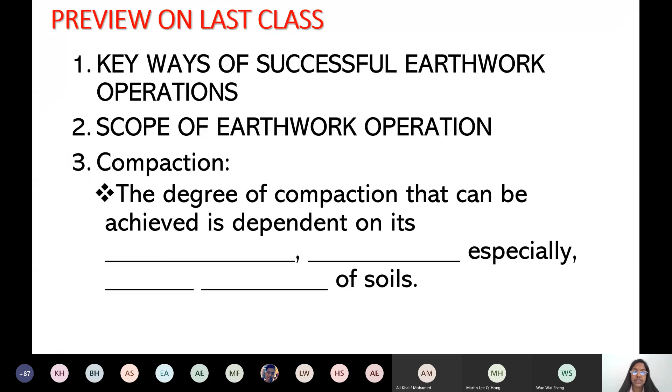compaction of the soil that have been used for earthwork operations, right? What is bulk density?

Can you see the slide? Review of last class - can you see the slide? I'm now showing the winners from last class. Can you see the slide? Yes, miss. Please tell me, what is bulk density?

What is density? Quick one. Others, I hear the same voice all the time. How many of you joined so far? I will take it later. Can you tell me what is bulk density? What is density? Mass over volume, right?

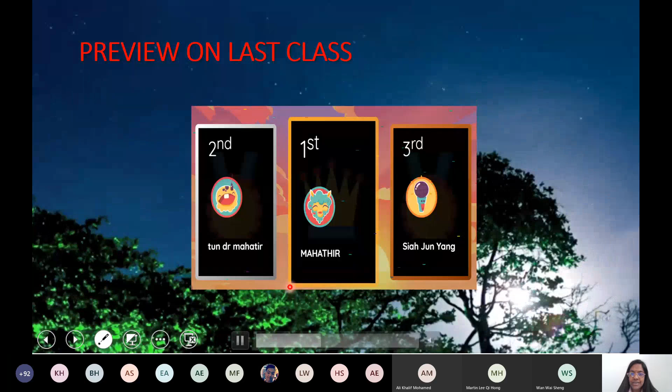How much material is stored or occupying a given volume. Bulk density refers to the same density but for loose materials. What do you mean by loose material? Anybody? Please think and answer me.

It can be wrong, no problem. I'm not testing now, but a response is important. All of you should answer, otherwise I pick people to answer. Make it interactive - what do you mean by bulk density? I asked, now I'm asking why.

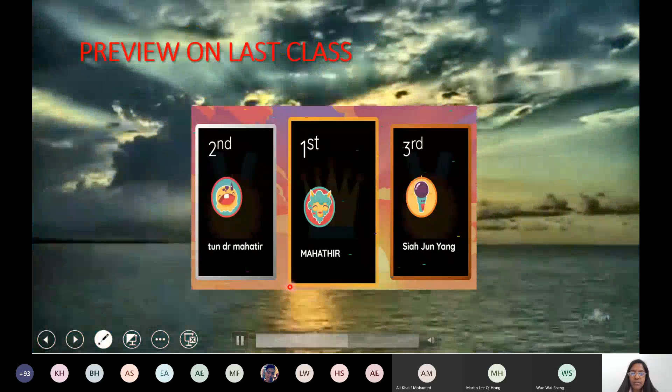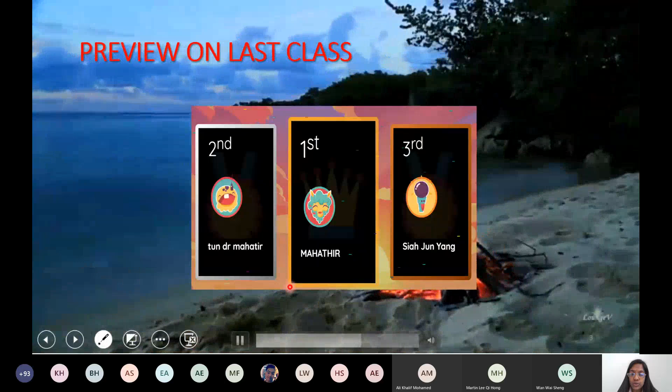No, I say it's a loose material, right? Bulk density is referring to loose material like grains, like soil, right? Earth, wherein you cannot use density because it is not tightly packed. Loosely packed - for any loose material we use bulk density.

Okay, what do you mean by loosely packed? Why do you say this is loosely packed? What are the other materials you can see there?

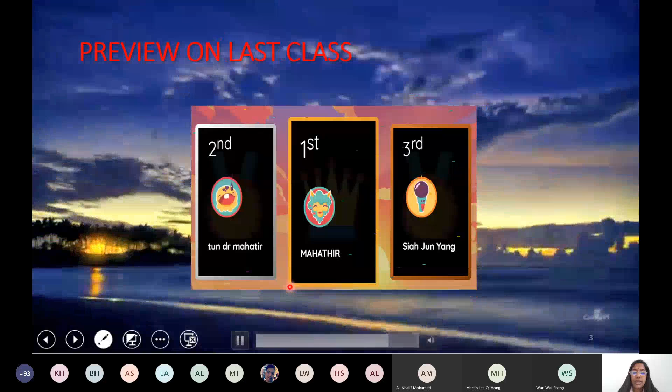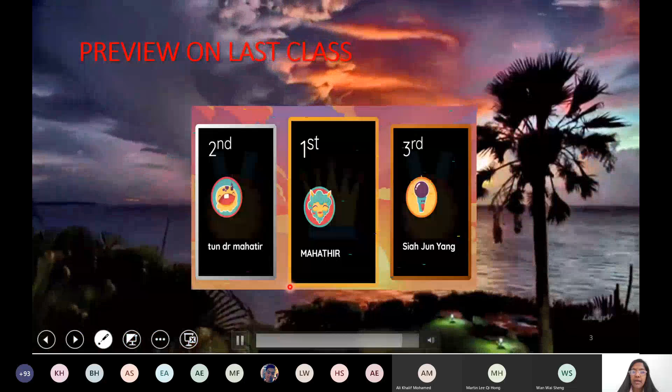So in addition to soil, you can see the air spaces, right? The pores are there, a large number of pores are there. The pores might be occupied by water, air, or any other materials. If it is sandy soil, more glass particles or carbon, and many other minerals are together with this, isn't it?

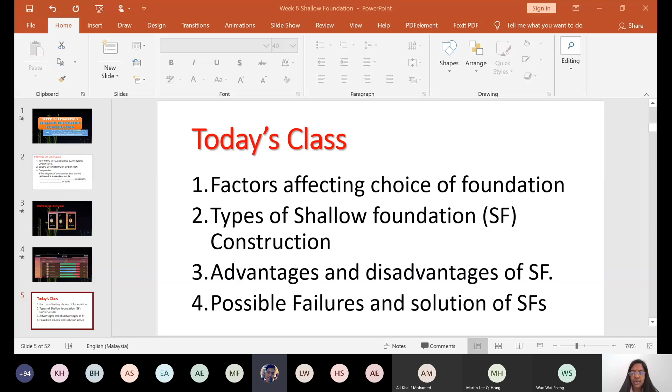Can you all see the slide? Yes, yes, yes, miss. Okay, good.

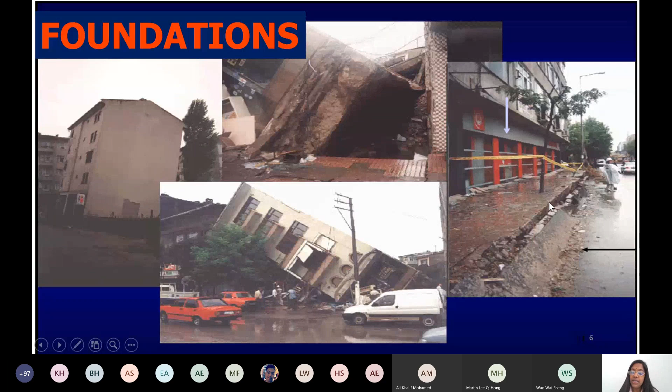It's not that - the drainage is not properly flowing or disposing of the water. There is a blockage, and these are all caused due to improper basement, improper laying of foundation.

Let us understand how this can be alleviated by proper understanding of the type of foundation, their limitations, and the conditions under which it can be constructed.

Number one, before you go into actual foundation design, you have to know the total structure, or where the location of the foundation is. Where is the foundation?

Bottommost is the prime structure in any building. It can be residential, research, or any type of building. A building construction can be classified into 3 categories.

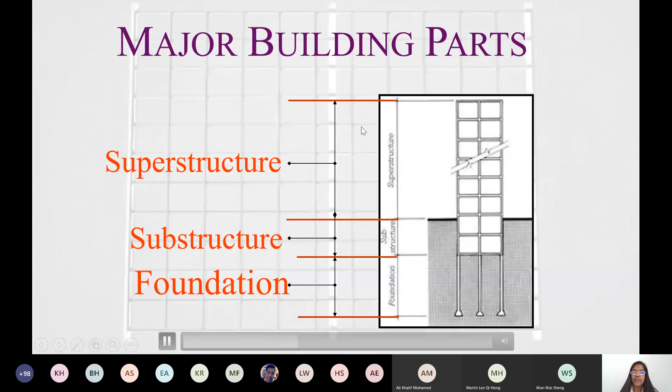Number one, the bottommost will be the foundation, and then the substructure, which is called the basement. Sometimes a structure may not have a basement, like in shallow foundation, because that space is occupied by the shallow foundation itself. We will see how they are. And then above this basement is what is called the superstructure, the top structure of the building that will be constructed.

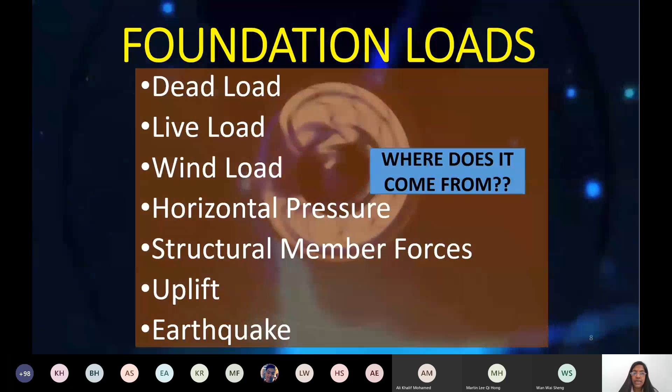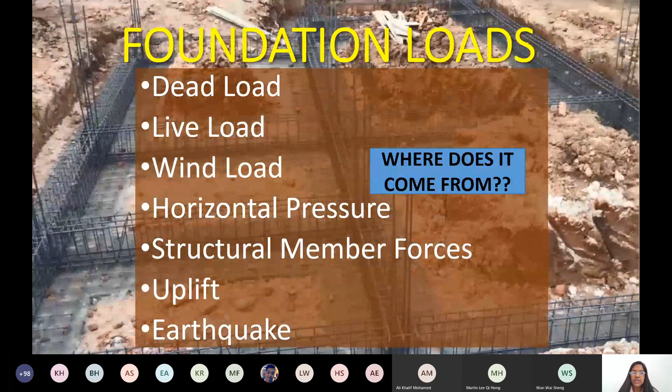As engineers, we should know how to design the foundation. The first and foremost thing for a design is calculation and consideration of the load. What's the purpose of foundation? Foundation is transferring the entire load of the substructure and superstructure into the ground, hence the structure is safe and stable at any point of time.

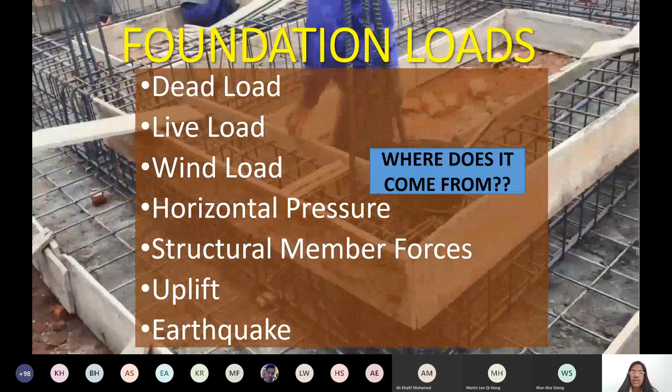It may be heavy wind, earthquake, or flood. In all these vulnerable situations, the building remains safe and strong due to proper consideration during foundation design. The first thing you have to decide or calculate is the loads. Let's understand the types of loads which have to be considered for a foundation or footing design.

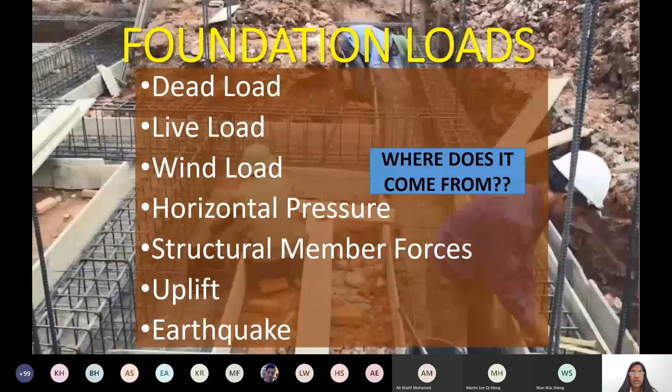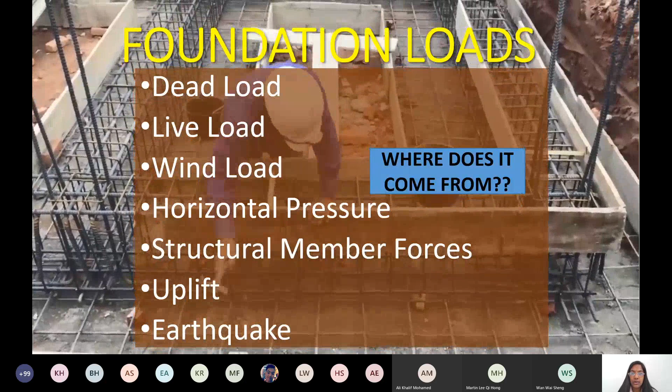Dead load, live load, wind load, horizontal pressure, structural member forces, uplift, and earthquake - these are the major forces that have to be decided. Depending on the structure, whether it's residential, medium story, multi-story, skyscrapers, or any type of bungalow building, depending on the occupancy, the types of load will vary. You don't have to calculate everything for all structures, otherwise you'll be over designing. There are limitations; you will understand by practice.

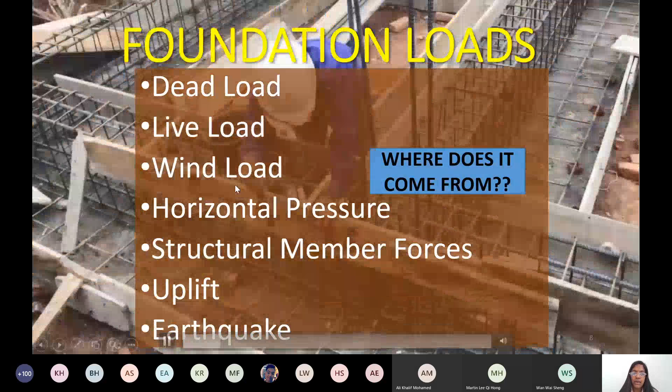But these two are the major and main loads that have to be considered in any footing. This is also important for buildings with more than 3 or 4 floors - above that, you should consider wind load and really go for an analysis of wind load, pressure, and other things. Let's see one by one what they are.

Let us understand about load distribution. I think the explanation is not here - the slides are removed because I need to accommodate more types of foundation. Let me explain the types of loads.

Dead load means self weight of the building, or weight of the building. It depends on the material used, and it depends on the size - length, width, depth. Based on that, you can calculate how much cubic meter of material is used. That is called dead load - the self weight of the material.

Live load may be the load that is moving - in a residential building, all the movable loads like furnitures, decorations, landscaping will be considered as moving loads. All live loads mainly mean moving loads, or loads apart from the material used for construction and the elements of the building like columns, beams, slab, and so on - all the moving loads.

Wind loads - due to wind, there are different types of analysis and design. You need to know which direction, and there are codes available. You can borrow the building codes - they have all the code values and coefficients for multiplying, finding the safe bearing capacity, and the proper design and sizing of the materials and components. You can follow the building codes.

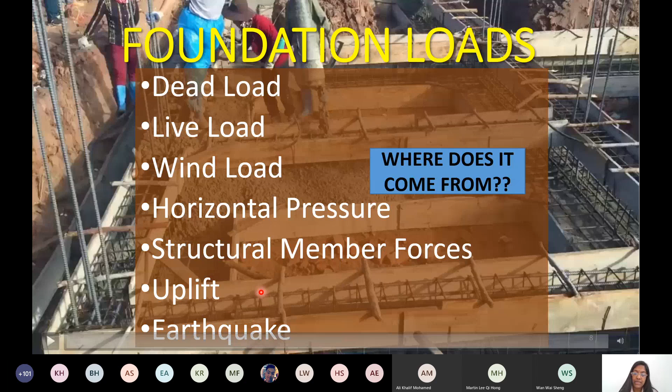Load distribution. Let us understand how the load is being distributed. There are two types we can see: one is for the slab, another for the roof. Let's see how a roof load is distributed and transferred down to the foundation.

Started with the roof. Here is the roof truss. I'm showing a truss building, but this is still valid for any type of concrete or brickwork construction. This is the roof. See the direction of loading. The force or load - what is the unit for load? Newtons. Okay, let's take it as newtons, or kilogram force if it is metric.

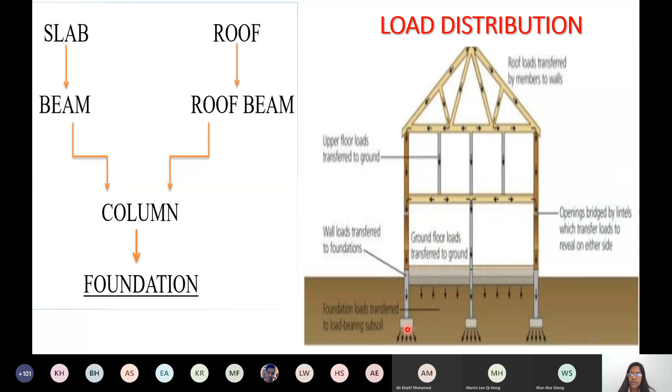So this force is coming over from the roof. It is being transferred to the beams, and then it is being transferred to the columns. You are seeing the cross-sectional elevation of the building, maybe a side view. This is transferred to the column next, and from the column to the subsurface or basement, finally to the foundation - can be any type of foundation. You can see the transfer of loading by the direction of the arrow, showing how the load is transferred to the foundation or the footings. This is for the roof.

And for the slab, you can see how the load is distributed from the slab - sorry, I mean the slab. Let us take it at one level; there's a nice drawing to explain this. The slab loading: the slab is resting on the beam. Hence the loading due to the slab is transferred to the beam. You can see the cut section here clearly.

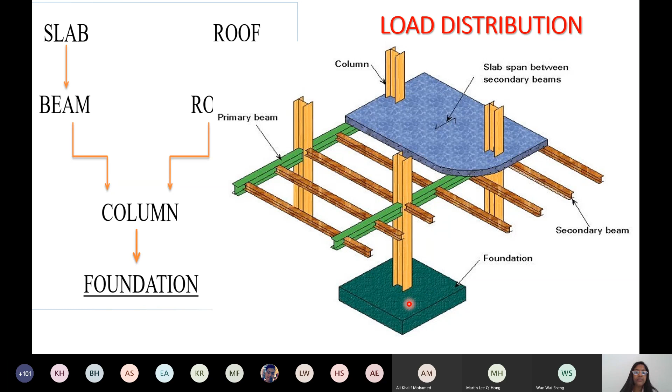And this beam will transfer the load to the column. The load from the beam is taken by the columns, and then the column will transfer the load to the foundation, which has a footing - a pad-like structure, or a cap. It can be a pile cap, or a footing cap, or a pad. Okay, being transferred to the foundation below the ground. Any questions so far?

No, miss. Okay, types of foundation. There are two - basically foundations are classified into two categories. Wherever you go - Europe, Australia, Middle East, India, China, anywhere - the types of foundations are shallow and deep. You need to understand this. Shallow foundations are used for low cost, light load, where the bearing capacity is good, subsurface soil is good, and depth of foundation is less.

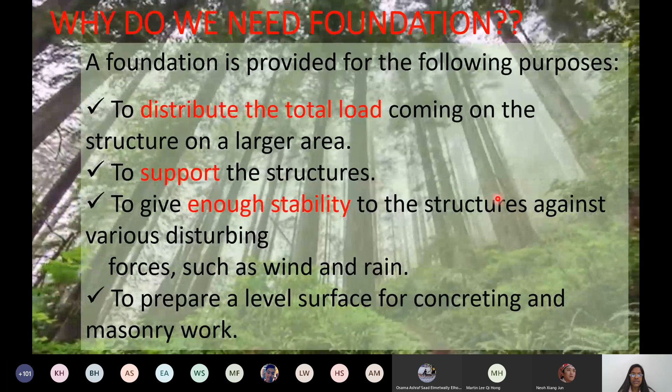A foundation is provided for the following purpose. Come on, detailed information is here. To distribute the total load coming on the structure, distribute, transfer, all are same, to the larger area, mainly the earth. To support the structure, to give enough stability.

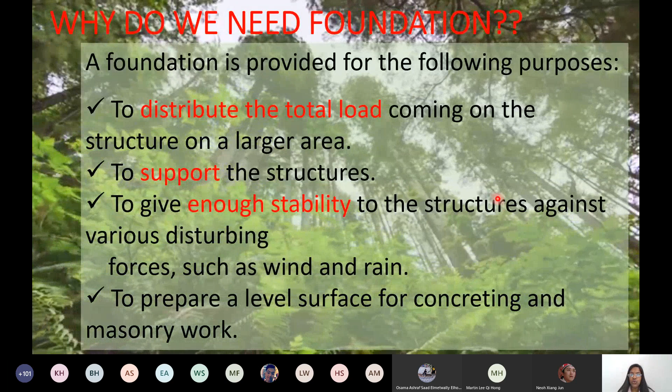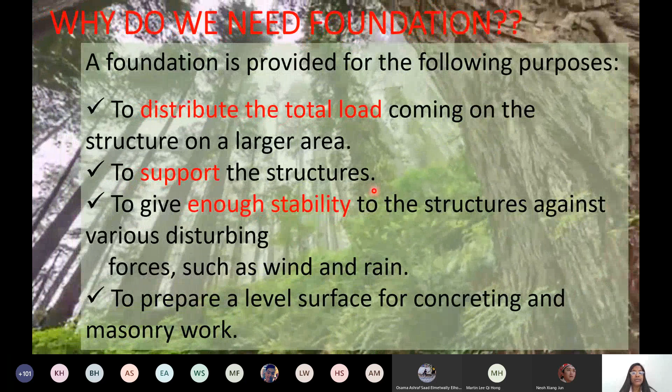I don't go in detail about giving more examples today because I heard there are some tests after this. Anyway, I will post this later if there are many examples needed through videos. For now, I touch upon the important things.

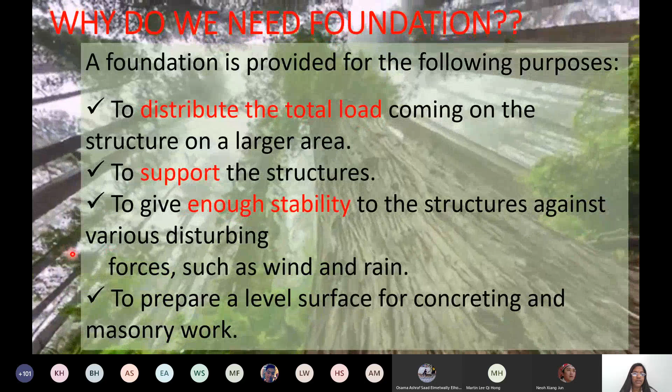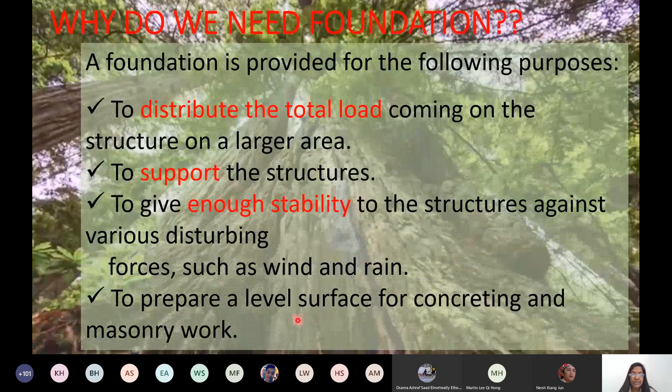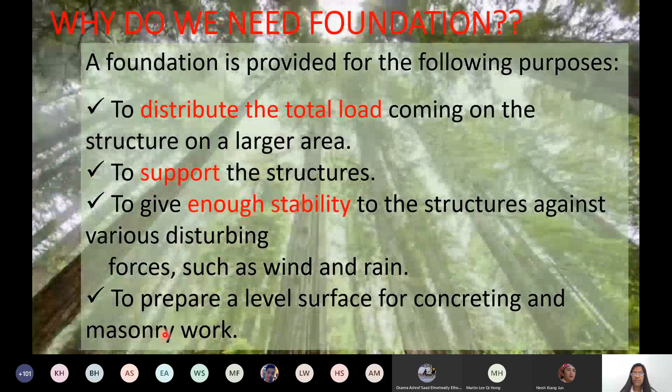Okay. To support the structure, to give enough stability to the structure against various disturbance like wind, earthquake, landslides, and so on. Forces such as wind, rain, heavy rain. To prepare a level surface for concreting and masonry work. Foundation is required to prepare a level surface, a pad or a mat for the masonry work above, a base for holding the walls and columns above. Okay, I don't do much on this, you can understand.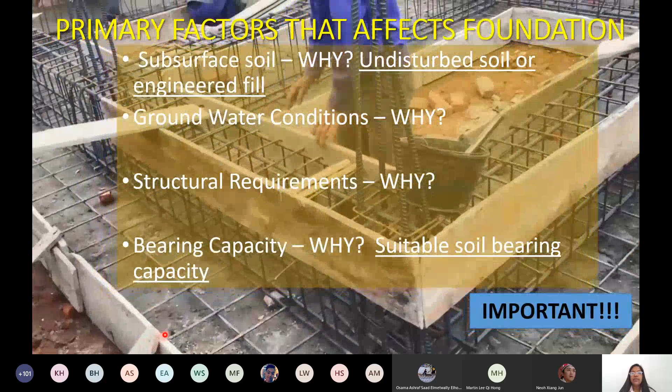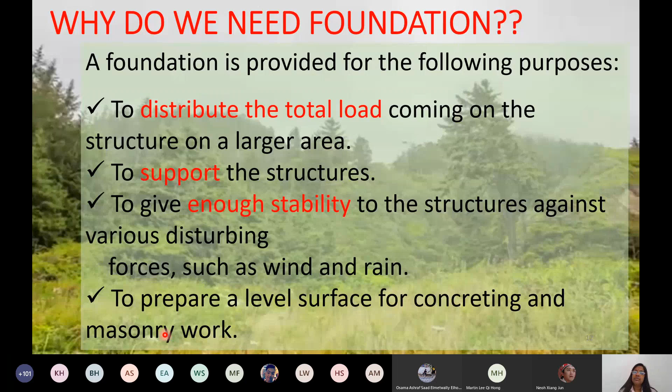Primary factors. Let's understand the primary factors that affect foundation. Subsurface soil or undisturbed soil or engineered fill. Okay, before I go into this listing, can you tell me what are the factors? You know what is foundation design, right? Now tell me what are the factors affecting the foundation design? Soil bearing capacity. Bearing capacity, very good. So that decides the type of foundation.

You should be clever, ingeniously select the type of foundation when you start the planning itself, right? In the planning, designing, before you do the construction, you should choose the proper type of foundation to avoid any type of failure. The example I shared last class in Gombak, right? In Gombak, there is a landslide because of unidentified underground water below the earth. After some period of service, they got the problem.

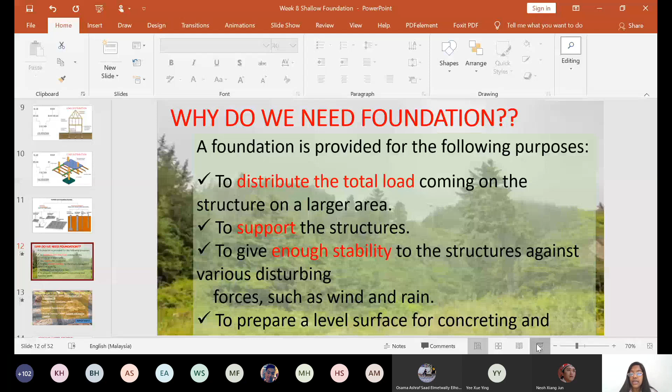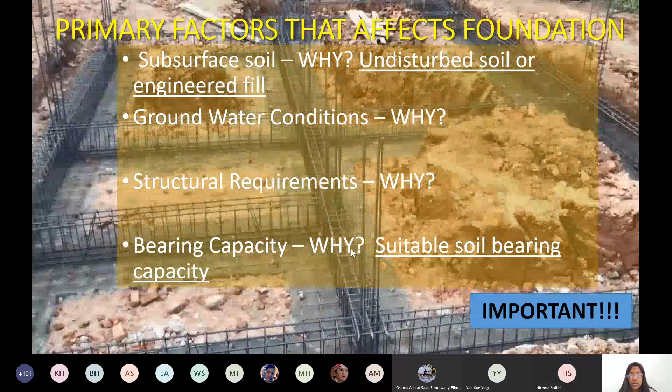Come on, let me check how many joined. 112 people, very good strength today. Only 2 missing. I don't know who they are. Okay, come on. Where are we? Can you all see the slide? Why do we need foundation? Oh, I did already. We didn't run factors. Yeah, can you see the slide? Yes. Okay. Anytime you cannot see the slide, please stop me.

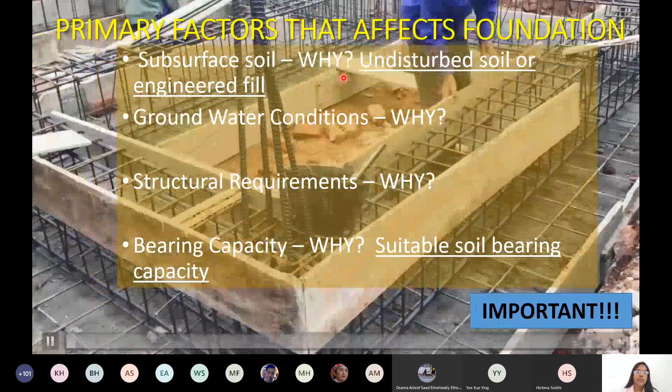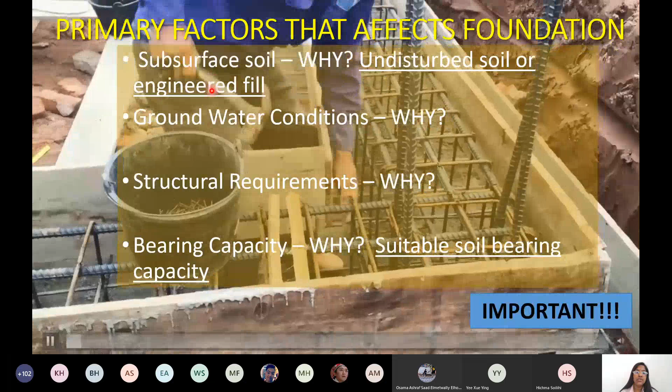Okay, thank you. Subsurface soil. The conditions or criteria which will determine the type of foundation will be subsurface soil. Whether your subsurface soil is just 1 meter below, right? And whether this subsurface soil is very hard, or soft, or needs to be processed, compacted more.

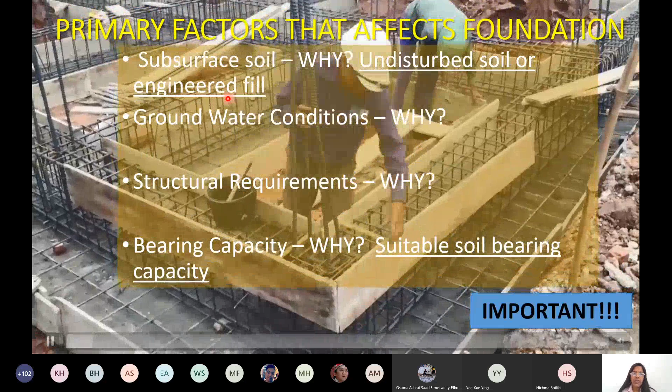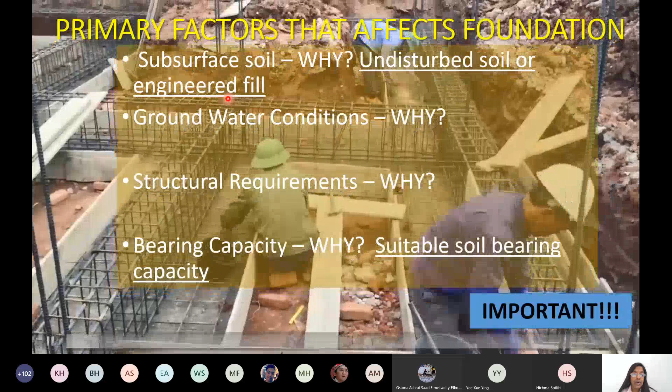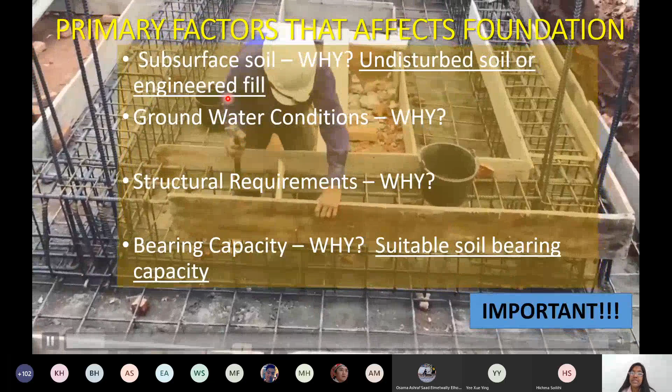And then groundwater conditions, whether the groundwater table is at one. See, in Malaysia it's quite common, unlike Saudi, India, China. India, China, and then Saudi, they all have water very deep, right? No water or very deep, like they have to go about 200, 300 meters below the ground. When you come to Malaysia, maximum 20. If you see the borehole data for Malaysia, you can see about 10 to 20, even 5 meter deep to maximum 20 meter deep, you can get very good groundwater.

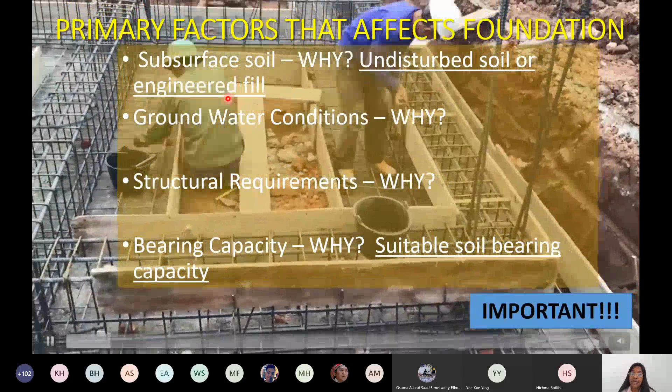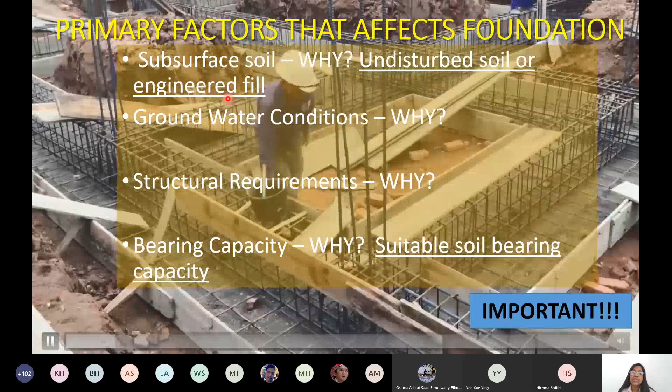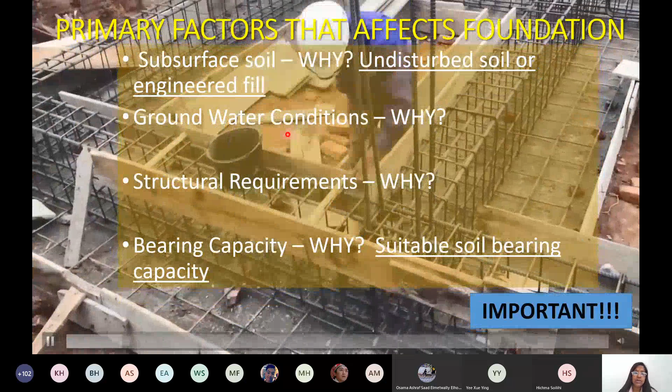So you need to check where the groundwater level is, whether it is a continuous supply or intermittent supply, what is the type of source, then you decide the type of foundation. That is important. You should not be putting your footing on the water table, right? It will be washed away. Your structure will be washed away.

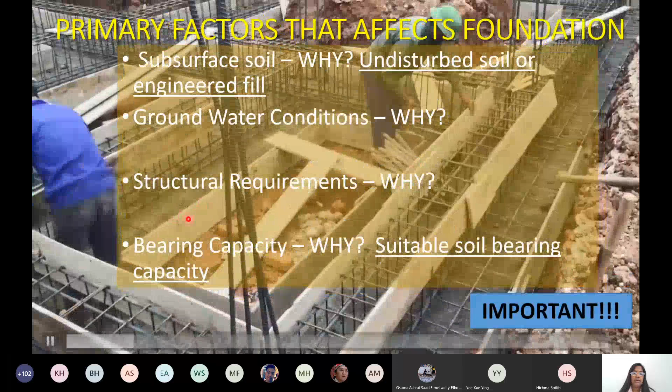And structural requirements. What are the structural requirements? Sometimes they want a floating structure. Sometimes they want a stable structure, some landscaping, full of landscaping, or full of moving material like a theme park, theme park construction, and so on. So it depends on that structural requirement as well.

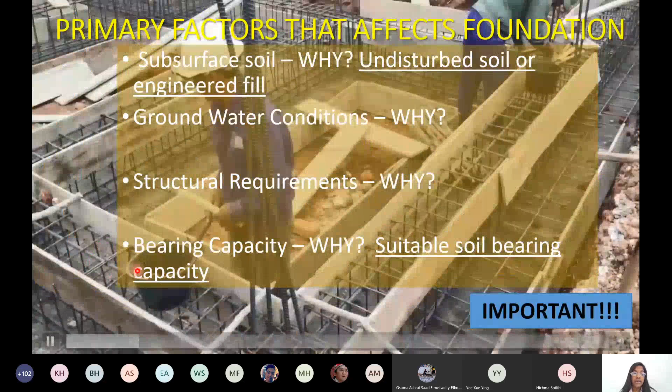Then bearing capacity, that's the most important thing. Our friend also told, bearing capacity is the main thing that will decide the type of foundation. When bearing capacity is already good from the soil, you go for shallow. If not good, go for deep foundation. Okay.

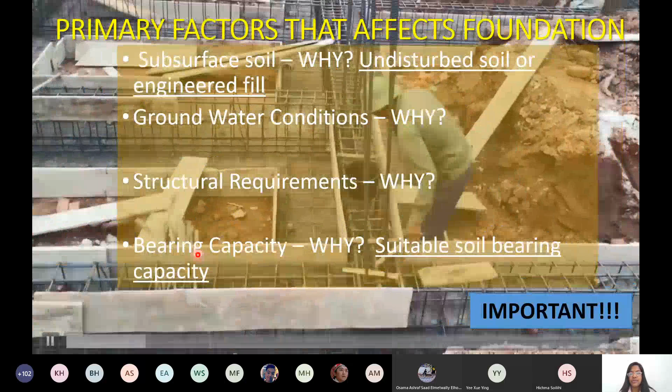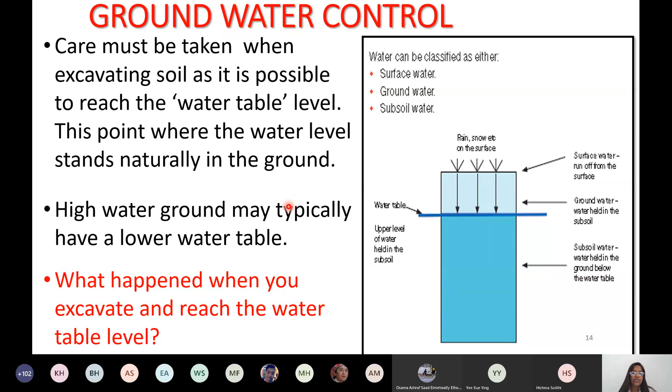And how do you overcome this problem? By using proper pumping arrangement. If there is any type of oozing out or passage of water, intrusion of water into your underground digging, then you should see what is the first thing you avoid, right? Wherever there is a high water table level, avoid such location and see whether you can entrap the water or remove the water, pump out the water by using this type of suction pump so that it will not affect your construction.

That's the information here. Why do you need to remove water? First of all, why do you get the water? Because of hydrostatic pressure, the hydrostatic nature of the water table there. What is hydrostatic nature? Some fluid mechanics. Anybody? Engineers? Problems of excavation depend on the tendency to fill in the excavation due to hydrostatic pressure. What is that? You have studied it in fluid mechanics. Quick one.

Pressure that is exerted by fluid. Oh, pressure. Yeah, very good. Pressure caused by fluid. The water moves from the high pressure point to the low pressure point. No, you touch upon the point, but it is not the correct valid reason.

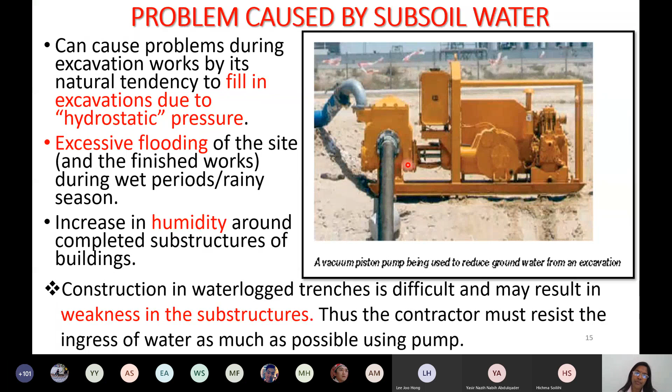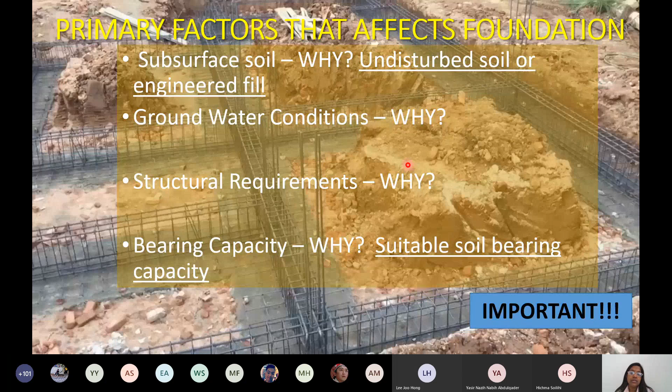Second, we just saw the primary factors like subsurface soil condition, groundwater condition, structural requirements, bearing capacity, and there are secondary factors, variables which affect your foundation choice: construction access, methods, and site conditions. Site conditions play a major role in the foundation choice, whether the public line or municipal line is nearby or far away. Depending on that, it may decide the type of foundation.

Environmental factors, right? Whether it was a pond before. Sometimes they fill up the pond and start the construction, right? Environmental factors like land use pattern, and then the climatic conditions of the place.

If it is always humid, if it is always a cold region, you should decide whether the raft or the shallow type of foundation holds good or not, and at what depth, how much time it is under humid condition, how much time it is under dry condition, you need to check.

Building codes and regulations, you should also follow. Your design is limited or checked by building codes, so check based on the codes. This is also limiting your design. In the beginning I told you, at the site you may see a civil engineer, a mechanical engineer, a supervisor who is not an engineer at all, right? A project manager who has experience in doing design and construction, right?

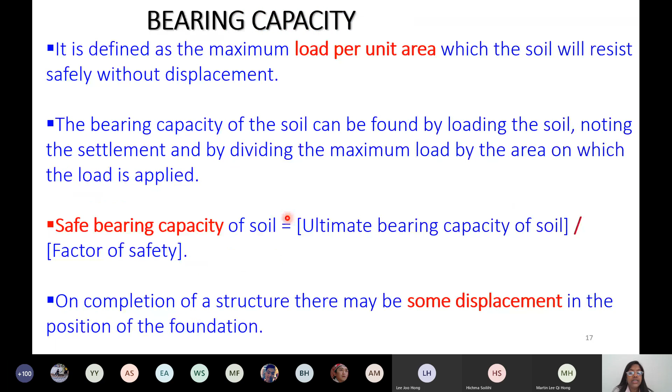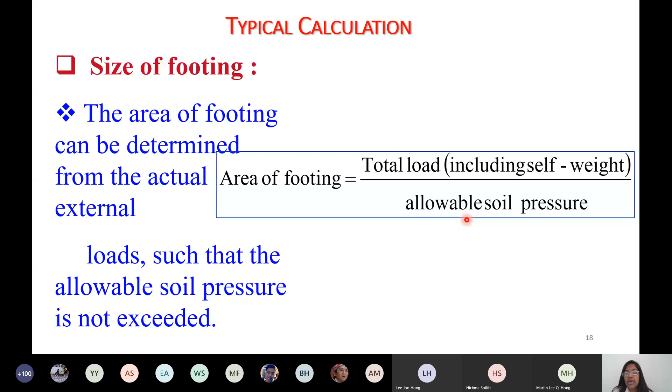Okay, the sizing of the footing in one line, a simple equation, a thumb rule. A quick calculation can be obtained by dividing the total load by the safe bearing capacity of the soil or allowable soil pressure, right?

Artificial methods to improve bearing capacity of soil. You can see some of the improvements for the foundation by increasing the depth of foundation, draining the subsoil water, pumping out, compacting the soil properly, confining the soil mass, cement grouting, and injecting chemicals like silicates.

Once you decide the type of foundation, or during planning for the type of foundation, you can go for these earth improvement methods or soil improvement methods, and then decide which type of foundation has to be designed, planned, and constructed. That can save your time, money, and also improve the efficiency of the design.

See whether by increasing the depth you can reduce the cost and increase the strength. See whether increasing the depth can increase the bearing capacity.

By draining subsoil water, if there is any subsoil water, find out the root cause, the pathway, and the quantity that is flowing there. Avoid or drain out the subsoil water by proper compaction of soil. If you found very loose soil, all of you know that the subsurface soil is very loose. Most commonly, the subsoil is found to be loose. You can compact the subsoil so that it is hard.

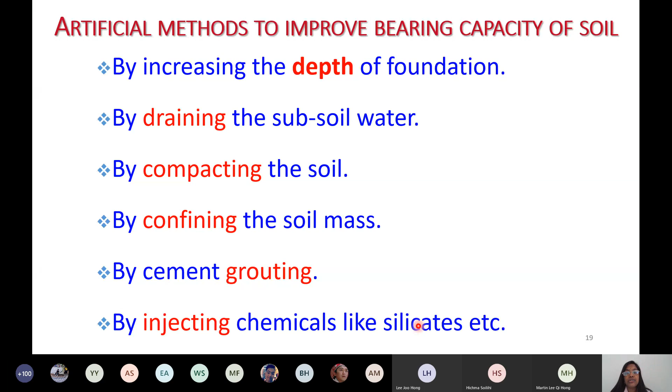Injecting chemicals like silicates, clay type silicates, are more in clay and sandy soil. So you can also have an injection of this mixture of sand and silt, or sand and clay, so that you can have proper binding and proper compaction of the soil. These are the ways you can improve the bearing capacity of soil before you design this type of foundation.

Essential requirement of a good foundation: the foundation should be so located that it is able to resist unexpected future influences which may adversely affect its performance. There are some unforeseen things you have to consider.

Suddenly the wind or climate may change, become more windy, or there may suddenly be a heavy downpour. That particular type of building may be subjected to a 100-year return flood. A 100-year or 1000-year return flood means a flood that happens once in 100 years, and its magnitude will be very high. It is not like your daily rain of 3 to 10 centimeters per day. No, it will be huge, about a meter, like a tsunami. A tsunami is a minimum of 10 meters high.

So if the building is subjected to this type of unforeseen return period flood, your building should withstand it to some extent. Further, you cannot be designing for a 100-year flood because it's a residential building, but you have to account for it to some extent to avoid unexpected failure due to unforeseen calamities.

The foundation should be stable or safe against any possible failures, so use proper materials and methods to have a stable and safe foundation. The foundation should not settle or deflect to such an extent that it impairs its usefulness. It should be stable, strong enough, should not tilt or get displaced. All these things should be avoided by proper selection of the type of foundation, material, manpower, and so on. There are many factors, but care should be taken in designing a good foundation and construction.

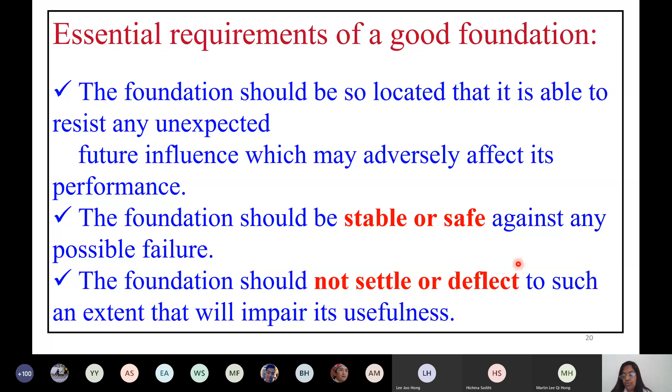While talking about the failures, major types of failures, let's see how they may be failing. Here you're seeing the types of failures, three types of failures.

This is a building framework. You're seeing the skeleton of a multi-story building, with the footing, the column, first level, second level, and ground level. You can see the small portion of the footing and foundation here, and this one is the basement, with the footing and column. In all these types, there is no settlement. The level of the ground and level of the footing remain unchanged.

When you go to total settlement, the whole building itself settles to this height, a small drop from the original level. The total building is settled. In differential settlement, each column or each row may be at a different level, some very low, others undisturbed. So you can see the sway here. The building is swayed and deflected, and the beams get deflected due to failure of the foundation or failure of the building itself.

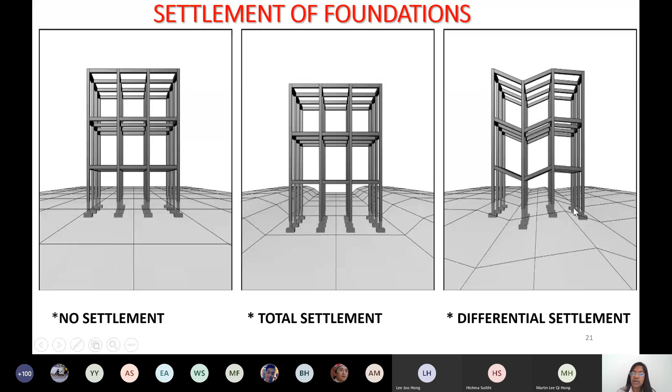Uniform settlement is usually of little consequence in a building. But differential settlement can cause severe structural damage. So uniform settlement we can still handle, but differential settlement is very difficult. Uniform settlement can be handled by proper projecting of the column and column pad, constructing underneath the ground, and you can lift the building together. But differential settlement is very difficult and complex to design and protect against, so care should be taken while choosing the foundation in the beginning itself.

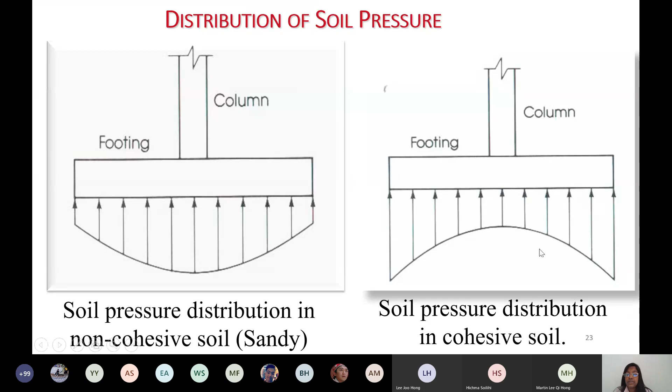In general, we can call this shearing stress. We will discuss shearing, puncture, and shear stress later on. Why do I call this shearing? Because one material is moving over another - during failure, the column is moving over the footing. We'll discuss this type of failure in detail later with diagrams, but in general it may be buckled like this, or punctured, or compressed, due to tensile or compression force.

What is shallow foundation? Let's move on to a detailed study of shallow foundation, which applies to every engineering structure. Any questions so far?

Oh, miss. Oh, no. No question. Please remind me, wait, I'll check the time.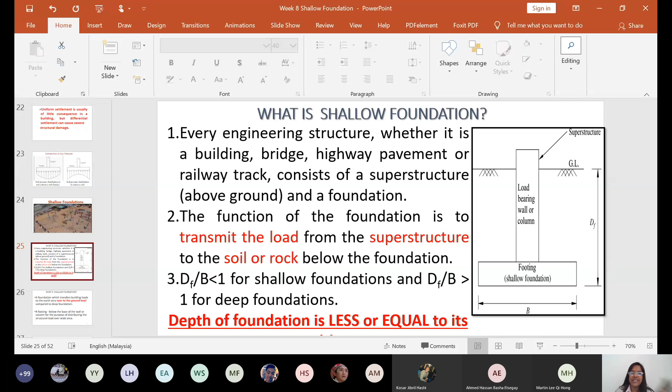What is shallow foundation, quickly? Every engineering structure, whether it is a building, bridge, highway, pavement, or railway track, all structures on the ground should be supported by a foundation. Hence, it's an important prior structure, which is the master or the parent for any building. The function of the foundation is to transmit the load from the superstructure to the soil or rock.

You've all studied already how it should be for a shallow foundation. For shallow foundation, the depth to breadth ratio will always be less; in other words, breadth will be more than depth, depth is very low compared to breadth, then it is called shallow foundation. On the other hand, if the depth is very deep, much higher than the breadth, then it is called deep foundation. Bear in mind, depth to breadth should be less for shallow, and depth to breadth should be higher for deep foundation.

If you want to select quickly what type of foundation to use, the first and foremost thing you have to consider is the depth and breadth. If the depth of foundation required is less than the breadth, then you will go for shallow. If the depth is more, like some feet, hundreds, 50s, 20s, then you go for deep, because shallow foundation can hardly go up to 3 meters, 5 meters, maximum 5 meters, 3 to 5 meters, not more than that. If hard soil is found nearer, like up to 3 meters, 5 meters, you can go for shallow foundation. 5 is also very high, so I can say 3 meters deep, you can go for shallow foundation. If more than 3 meters, then it is called deep foundation.

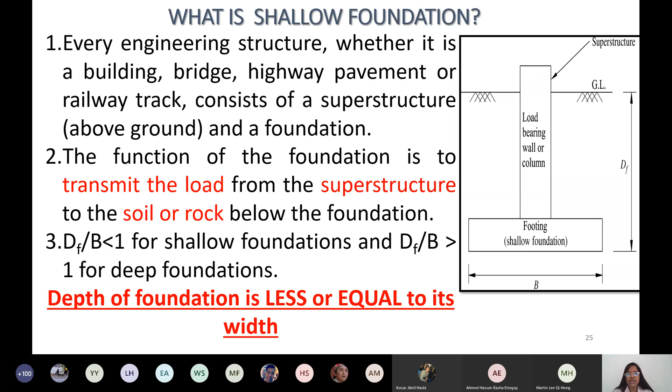A foundation, quickly, is one which transfers building load to earth very near the ground level compared to deep foundation. Yeah, very near, that is 1 to 3 meters. Can you imagine 1 to 3 meters? Height of a room, right? Maximum height of a room. I can call this a footing.

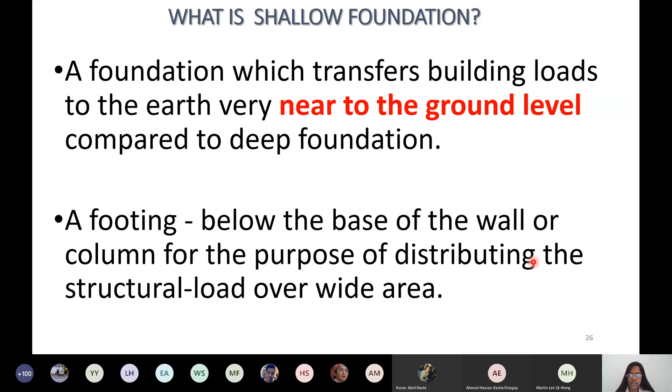A footing is below the base of the wall or column, for the purpose of distributing the structure load over a wide area. A footing is a kind of base, a rectangular platform, a rectangular base, a slab, which absorbs the load from the column and distributes the load to a wider area. It has a wider area to bear the load that is coming over.

The real difference between shallow and deep foundations is based on structural response as well as the depth to which the foundation is taken. As I just explained, depending on the depth, you can decide: if it is deeper, you must go for the deep foundation; for shallow, up to 3 meters, 1 to 3 meter, you can go for shallow foundation. If hard rock or hard soil is found up to 3 meters, you can go for shallow foundation. Bending is the predominant structural action in the case of shallow foundation, so you have to check whether there is deflection or bending.

Just now we saw two types, right? Tensile and compression type. If you check the soil for bending stress and it is predominant, that means bending is the predominant structural action in the case of shallow foundation. Because of the smaller depth you're going, there are high chances of flexural stress, so you need to determine the flexural strength of the soil before deciding the type of foundation, whether that particular shallow foundation can withstand this flexural strength. Otherwise, go for deep foundation.

There are equipments, even in our lab we can see equipments used for triaxial tests. Seniors may know, or if you go for soil mechanics or foundation engineering, you will be using this to determine the flexural strength of the soil. Triaxial testing machines are available.

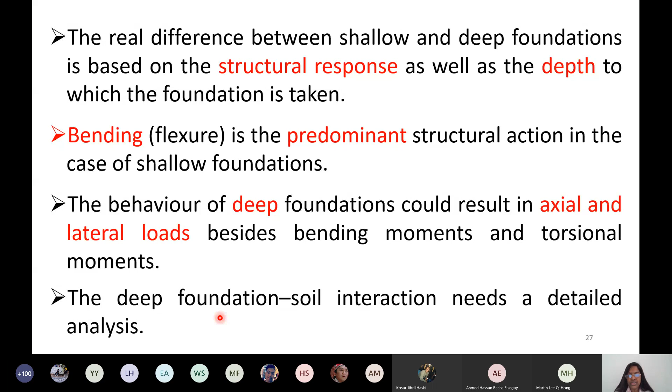Types of shallow foundations. Quick one, and this is most important for you. This is the scope of study for today. I may be asking questions in your assignments, and your quizzes will all be based on these types, all the types and their limitations. You should be able to classify and understand the purpose and limitations of each foundation. That's the main purpose of learning this chapter.

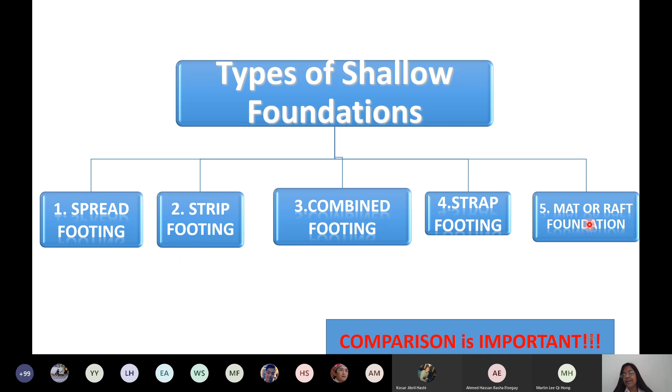Spread footing, strip footing. See the name itself, you can understand. Relate the name and the meaning of the word: spread, strip, combine, strap, mat or raft. Actually, when we were studying, there were only 3 types. Now more evolution has come out. We can use 5 types of shallow footing: spread, strip, combine, strap, and mat or raft. So comparison is most important for your assessments.

Spread or pad footing. How is it? You see the diagram here, it's easily understood if you look at the picture. This is the column, an I-sectional column, and there is a pad, and there is a footing. For a single load transmitted down a brick pier or concrete column, the most common foundation is square or rectangular, with a thick pad. A pad is used as a cushion-like intermediate element which transfers the load uniformly to the footing. To spread the load over a greater area, it is necessary either to make the pad thicker or use reinforced concrete, mostly as a slab with reinforced concrete. If load increases or the bearing capacity of the ground is poor, a larger foundation pad will be required. So spread or pad footing will be most commonly used in isolated columns.

Excuse me, who changed the...

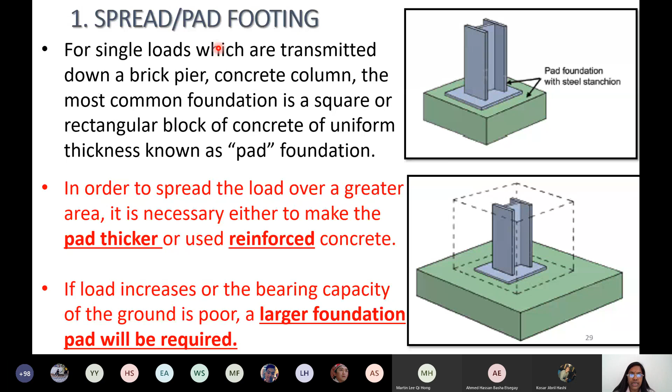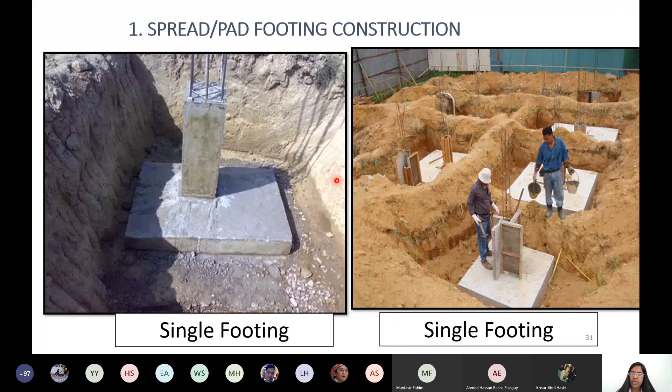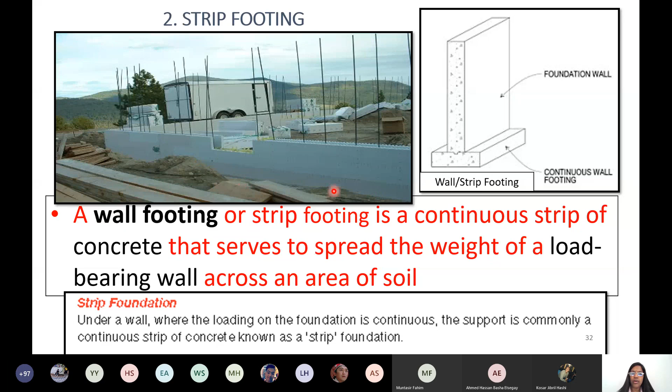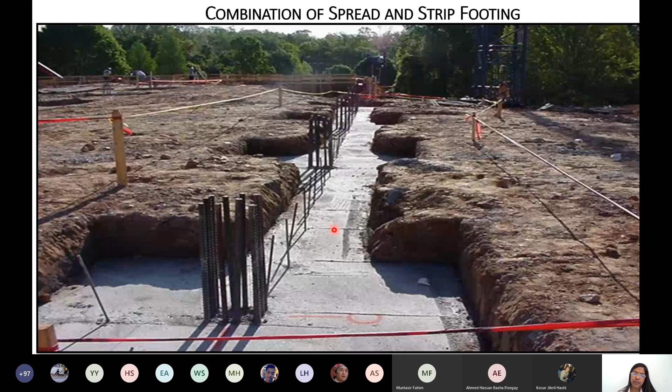Come on, what's the advantage? Combined footing is a single footing which supports 2 columns, when columns are very near to each other and their footings would overlap. The center of gravity of the footing area should coincide with the center of gravity of the combined loads of the columns. A combined footing may be rectangular or trapezoidal in plan.

You go for combined footing when the columns are closely spaced, according to the design. You don't have to do the isolated one; you can do this type of combined footing. Care should be taken. You see, this is a very important point. What do you mean by center of gravity? Quick one, we don't have much time. What do you mean by center of gravity?

Point of equilibrium. Okay, equilibrium. In other words, in technical terms, mechanics of materials terms, equilibrium, yes, it's all at equilibrium condition. Then you can solve. Any other word? Center of gravity, quickly. There are two things you should know: centroid and center of gravity, right? There are differences between centroid and center of gravity.

Let's understand what is center of gravity first. What is center of gravity? The point towards which all the forces or net forces are acting, isn't it? It's very interesting if you draw and show. Okay, let's see here. This is a square, right? This is a column. If you draw a perpendicular line on this, there is pressure acting at this point, this point, this point. You can put many arrows onto this block, isn't it? And the total force or the net force will be acting at the center of this column, right?